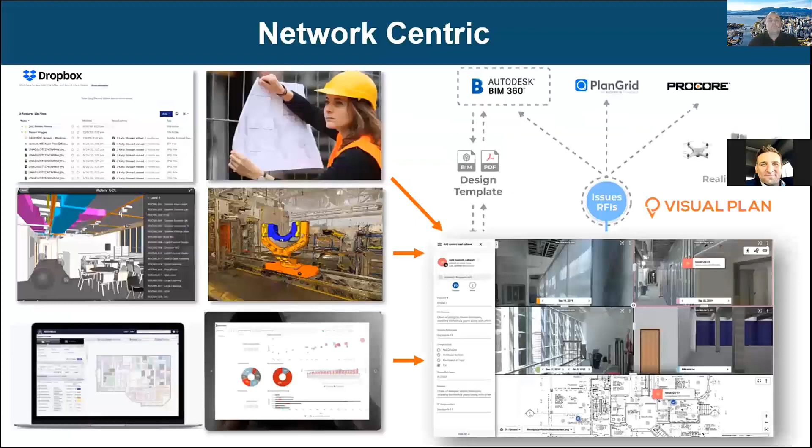I guess one of the biggest points here is that we work in these silos, and there are a few people that have access to the data when the organization could have a big value by having that data. Next slide. So let's talk a little bit about the physical CAD world and the different types of data sets.

So in the top corner here, a lot of what we do today as service providers of facilities, and even with different personnel in a facility department, we work in this land of file share, Dropbox, photographs, digital CAD PDFs, and how to manage that is challenging, or even physical blueprints.

If we're fortunate enough to have invested in digital twins through the construction phases, we may have BIM models, building information models. We may have point clouds and other really valuable data sets we've invested heavily in. But unfortunately a lot of these data sets end up on engineering's desktop, or they're hard to access and hard to find. I even have an experience like that myself I'm going to talk about in this presentation.

And then lastly, how do we get this information not only in a logical, sortable way that we can access efficiently, but how do we get it into our existing operational softwares? Whether it be an FM software, facility management software, CMMS software, whatever you're using to manage your data. We're talking about visual data, 3D data, and 2D CAD data. There's a lot more an organization needs to manage with documents, policies, procedures, et cetera, so it is a bigger scope than what we're going to talk about today.

But how do we do this efficiently, get access to that information quickly, and share it through an organization? On the right here we have a screenshot of our software, but how do we use construction management and project management tools, and add visualization elements to the process of what we're doing, so we can be a lot more efficient, make fewer mistakes, have less miscommunication, and overall fewer issues.

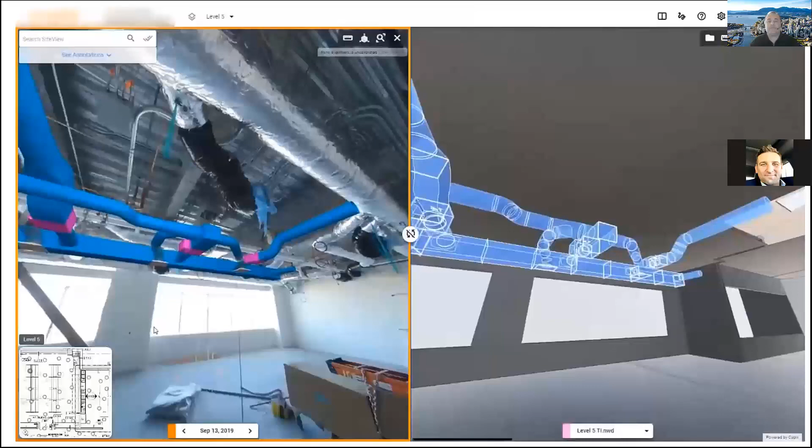I'm going to play this video as a simple example of a BIM model on the right, showing a specific model design of an HVAC system, and augmenting that reality into the existing structure, or doing some layout. For plant layout and basic clash detection, it's more about where is it and how is it oriented, as opposed to a precision engineering application, where LiDAR would be a better focus.

And we do host LiDAR as well. So all these data sets come together in the same platform: BIM, 2D data, 3D LiDAR, and 360 imagery.

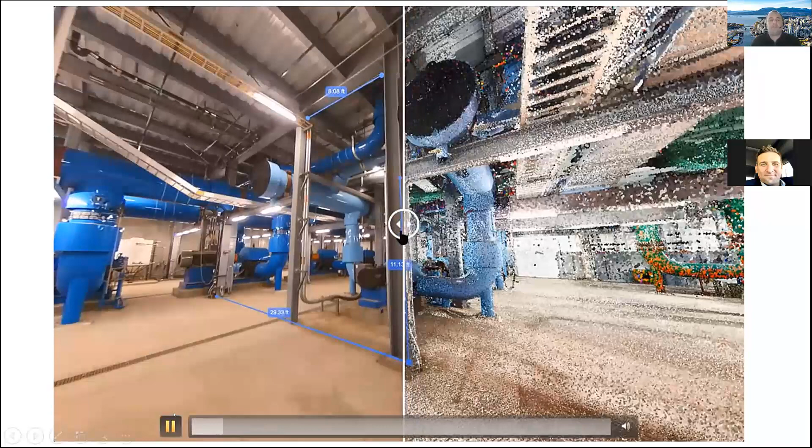Another thing we launched just today in beta is the ability to bring in point clouds and overlay them with 360 imagery and BIM, to be able to measure between them and reference between them. What's really critical is the way we bring this platform to market—it's a super easy, user-friendly platform, just like Google Street View, where you can toggle between these different data sets and access them. So we truly have a way to deliver data to an organization operationally.

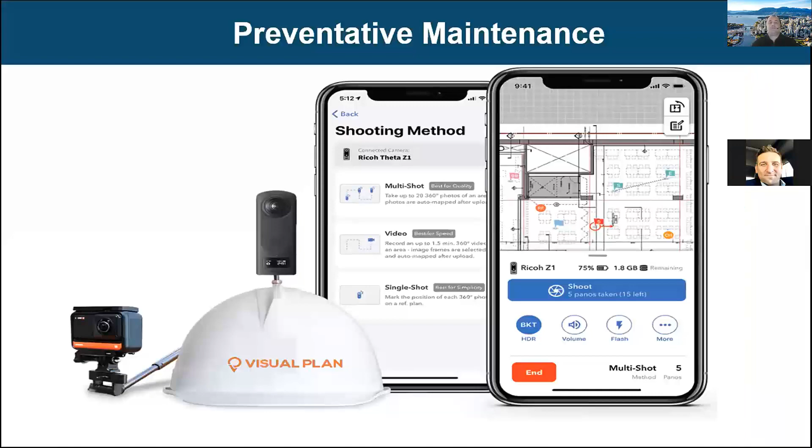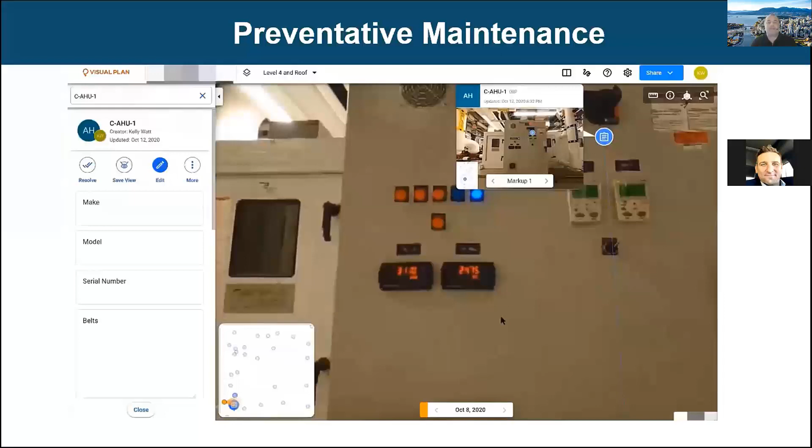This is a video as well, so we'll play it, looking at preventative maintenance. One aspect a lot of facilities would like to do, but it's very time consuming and tedious, is to tag all their assets effectively—to make sure we have make, model, serial numbers, belt sizes, filters, and historical information about their assets, especially the ones we need to maintain.

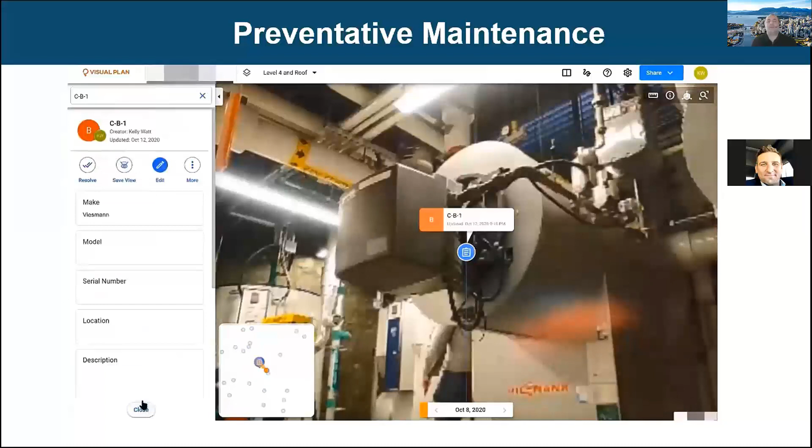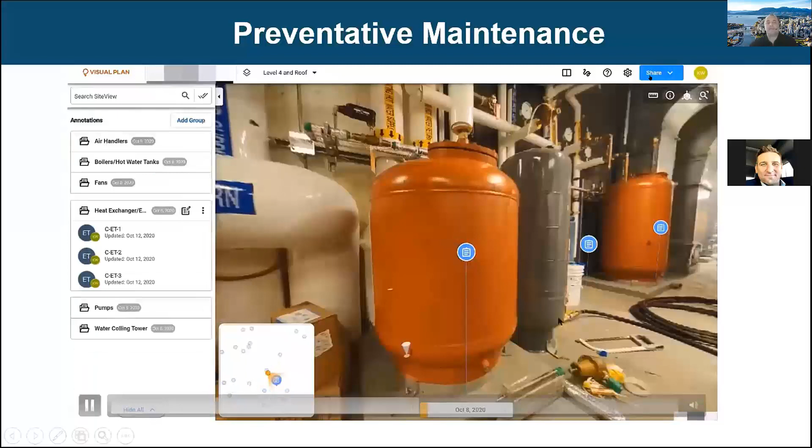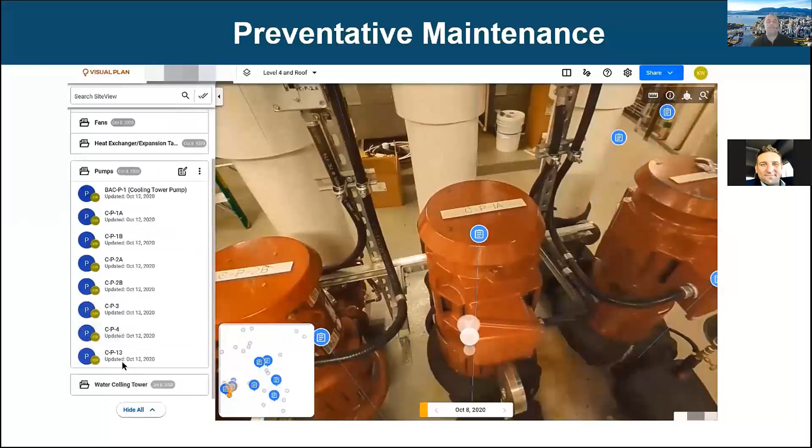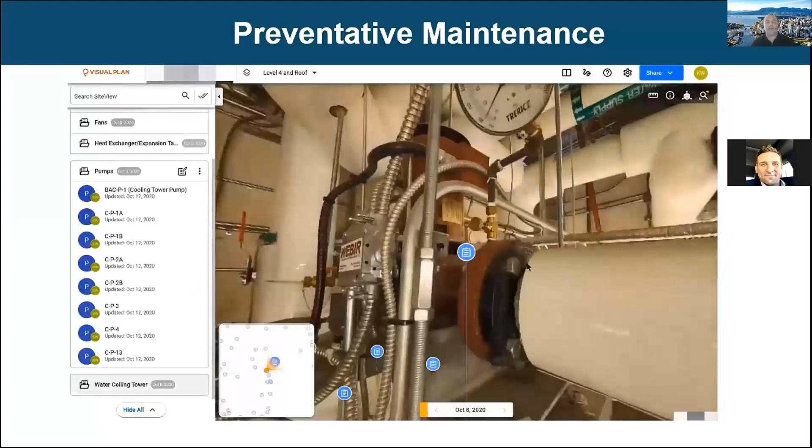So we have a really quick and easy method to do that, and this information, through a deep link, can then be embedded into your existing asset management software through the share link. We take this information, tag it, and give a web link to a specific room or space, uploaded to a CAFM or asset management software. Now we've turned something that's really data driven in terms of work orders and data entry into something a lot more visual, giving us context, orientation, measurability, and other aspects we need to see—because really, we need to see it to believe it in a lot of this context.

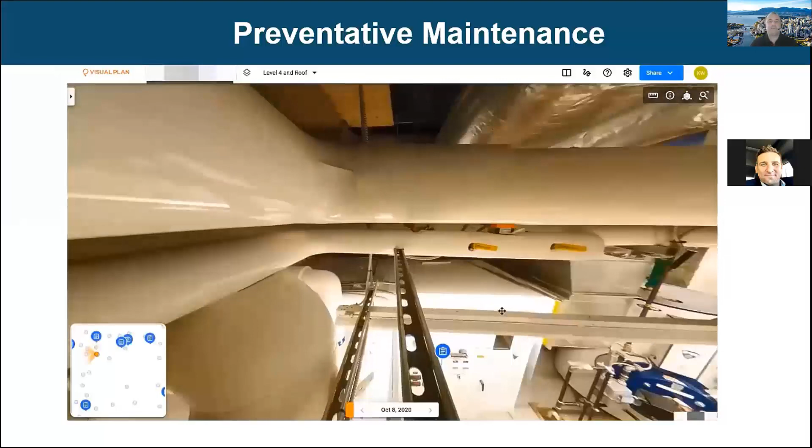So next, one of the projects we're working on is with an interesting company, PunchAlert. There are a number of mass notification softwares being used a lot on campus, hospital campuses and so on, where personnel carry their mobile device and can report issues or emergencies, and the reports go out through a text message and get to the right people quickly so we can respond.

With this company, we have a pilot with a university, and we're going to be taking our scans of the buildings right down to a room level, to a specific room, or in this case, we have some Bluetooth beacons.

So take it down to where that beacon level is. It could be a Wi-Fi device, it could be other smart sensors. If we know where those sensors are located in the building, I can give a link to the visual aspects of that point of the tour, and then have those links baked in so that when a notification goes out, you can click to see.

Click to see where you're at. And not only are you at that room, you have the whole tour at your fingertips, but at least you can start from that room. So managing the incidents and being able to send announcements, to receive tips through those deep links embedded into platforms or industry apps. And this is just one example.

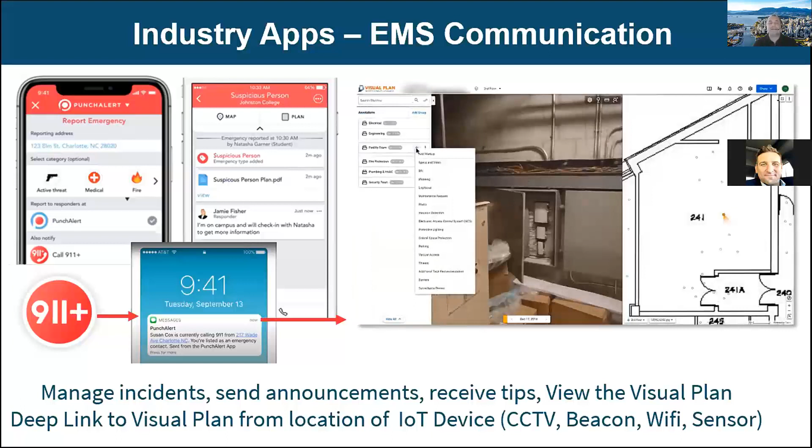And Jeg, our next speaker, is going to talk about smart sensors and how things like humidity and sound and all these other types of real-time data points that we get from a data analytics software, how can they bridge the gap from looking at dials to looking at the actual facility?

Now, can I tell you why? My experience. Now, I came from Faro. I came from the LiDAR space. I know how to deal with point clouds. So I asked for the point clouds of this project. I get them in a Dropbox folder.

I get 26 files. Okay, now what I have to do, I go to Faro, I get a demo version of the Faro Scene software. I download that, I process them. It takes me 8 hours, baked it on my business computer, and 8 hours later, I got something partially processed. I try to create the point cloud. I try to get the recap file. And what happens, I get frustrated.

Why? Because I don't have the Alienware computer, the $5,000 computer I used to have. So I'm not able to get that data in properly. So it is one of the examples of challenges we have with this complex data, whether it be BIM or point clouds or other, and it's hard to be able to share and see and to be able to compare those data sets. Obviously, I'm going to get this in later this afternoon, but I thought it was an interesting story to share here. Go ahead.

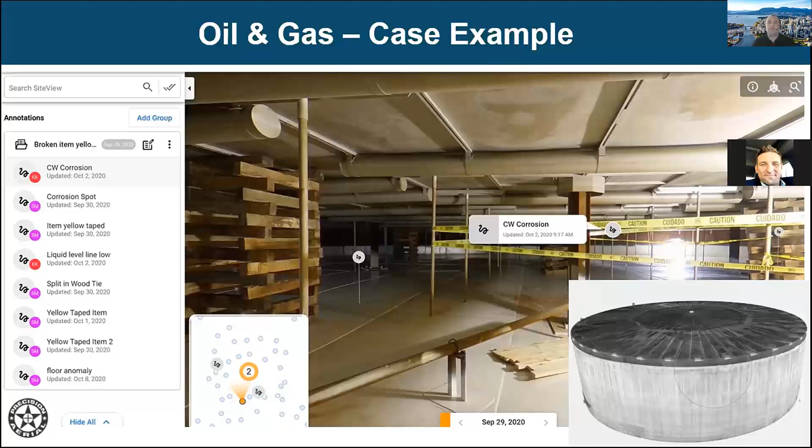We also work with drone data. So whether it is a drone point cloud that we brought in or a orthomosaic image that's created from a drone, or whether we're taking 360 cameras and actually putting them on the drones and flying them in different areas to collect 3D data and to ingest them and to be able to visualize them.

And there are other types of autonomous vehicles, right down to just getting an RC car. And what I like to say, a MacGyver, and be able to place a camera on it. And as long as we're within about 150 feet, we're in a crawl space and I want to be able to get access, it's a really kind of fun and easy way to get access and do that.

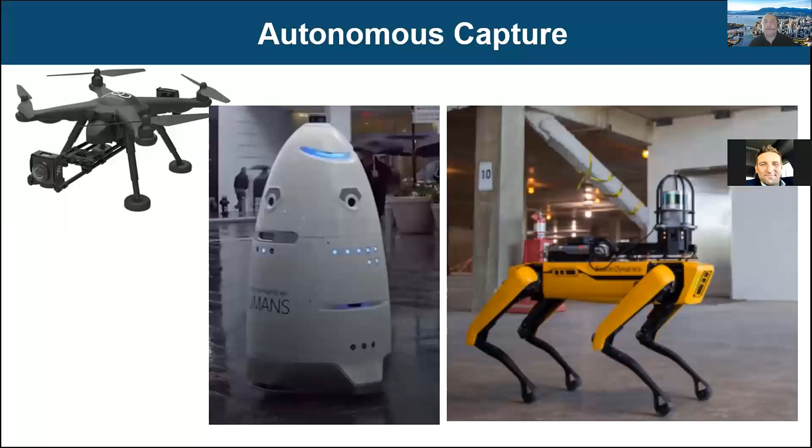The nice thing about what we're doing with the 360 imagery is the cameras that we're using, the hardware we're using is about a $500 to $1,000 camera. So extremely disruptive in terms of rolling something out nationally. You have 100 facilities, you want to capture them. That's absolutely possible. It's absolutely possible. Next slide. So a couple industry examples.

We're working with a company called Ion Asia that does a lot of work in Asia, in Hong Kong and mainland China, with multinational companies. One of the challenges we're seeing with COVID is we can't just fly out to these facilities and do site walks. So with James over at Ion Asia, we did a project a couple weeks ago with a large transportation company, scanning that and doing a quality and safety risk inspection. We took the standard industry forms they use and created those into actual annotations.

We could annotate physically into the visualization and extract that information into a spreadsheet and a report. So we work creatively with clients now, whether it be a maintenance application, a risk assessment, or a quality safety inspection, looking at different ways we can virtually walk through and tag items and identify issues. But more than that, to get on a virtual environment like we're doing today, to have other perspectives on a problem, to have a critical thinking exercise, and to determine the best results and the best answers to the problems we're facing.

Next slide. Another company we work with is Butchco Inc. and ESI Convergent. They put together a really cool package on helping companies get back to work. The process here - social distancing, testing, entrance assessment policies, and stay-at-home, work-from-home - is really dependent on facility information to do their job. But again, they themselves can't always get to the facilities.

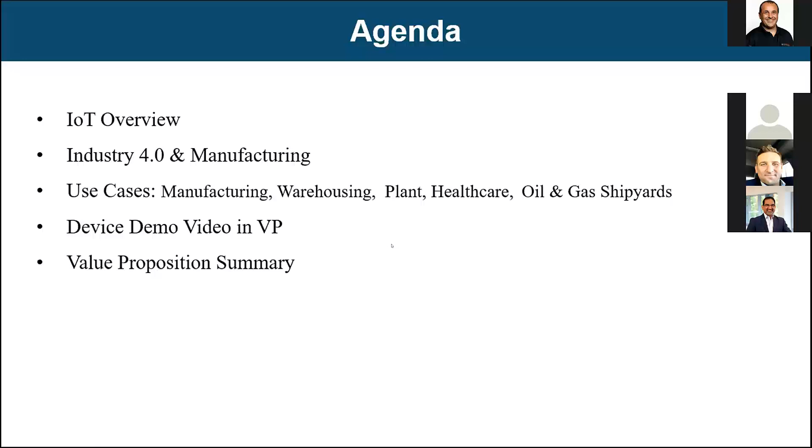Quick introduction, I'm one of the co-founders of IoT to Analytics, founded in 2019. Our focus is logistics as well as manufacturing using Industry 4.0. We have partners with a wide area of experience, over 150 years. Our core thing is provisioning of customized IoT solutions. Expertise in cloud as well as edge computing. Invested heavily on devices, sensors, gateways, advanced analytics and stuff like that. Some of the things we have put together today, we'll talk through it. We also have an overseas development center for devices and sensors.

With me today will be Brett, who's basically a business development manager at Visual Plan. He has been 18 years in the facility and manufacturing environment. He'll be helping me out. He's got 7 years in 3D LiDAR and the metrology industry. He also has expertise in software and capital industry as well.

So let's do a quick IoT overview. What is an IoT? Many of you guys might have heard of this one. IoT stands for Internet of Things. Basically, it's physical digital devices with sensors to collect and share data, right?

Generally, you can either have a sensor separately, or you can have a gateway which consolidates the information from all the sensors, either Wi-Fi or cellular connected devices. You can have either a cloud-based solution or an edge-based one, depending on your applications. This is about collecting and consolidating information to track any of your assets. So if you have any physical assets you want to track, and you want to understand their dependability and variability in how they're functioning right now, you connect through all these sensors and use cloud and edge to collect the data, and then you analyze it.

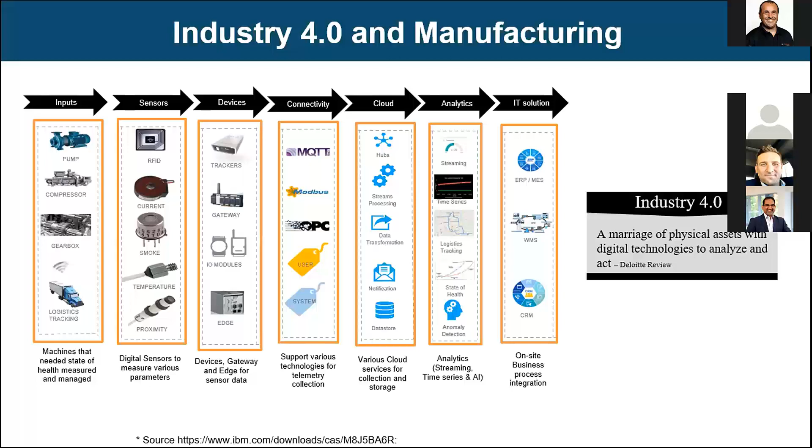So this kind of gives you a holistic view about how all these components of IoT combine together and provide a solution and make sense out of this Industry 4.0.

Next slide, please. Yeah, this is a small POC. My partner and myself, we did that last year. We had an asset which we wanted to identify and track some core parameters of. Here, we were monitoring current, vibration, temperature, and humidity, and trying to calculate this OEE, which is overall equipment effectiveness, and how you can use that OEE, as well as data, as well as machine quality.

And as well as the machine hours and those kinds of stuff. How do you do a proactive equipment maintenance? And how do you reduce your inventory of spare parts? And can you do some kind of prediction of the remaining useful life of a motor or a pump or those kinds of stuff?

The picture you guys see was a real-time picture at that time. We calculated, we had streaming data coming in. I think it was every 30 seconds or something like that. We were calculating the data, and any exceptions that happened would basically send an alert notification to your email or to your phone number, just something like that.

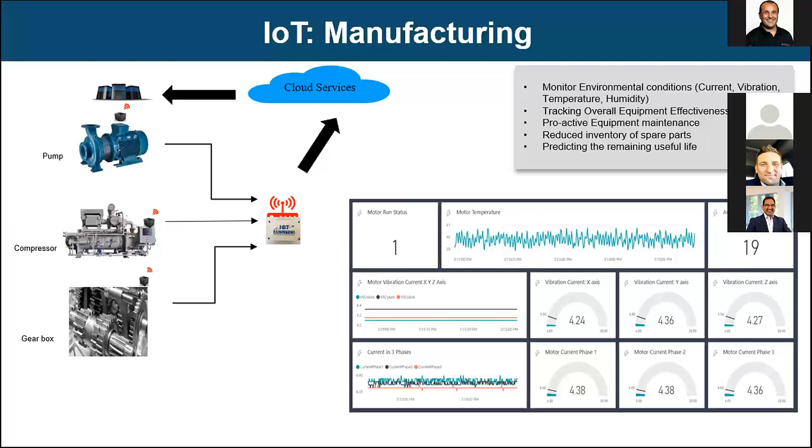So next slide, please. Yeah, this is another fallout of our POC type experiment, what we were doing. You can see the machine availability by run hours, by different types of machines. We had two different machines there. And also we had how the manufacturing performance was doing. We were using some binary keys to collect that. Mostly, generally this type of information will come from some kind of infrastructure already placed in PLC or SCADA or something like that.

Information was coming in, and then you also see quality by hours. So you basically identify some of the products you have, was that a rework, and those kinds of stuff, and then eventually we calculate OEE by hour. This is how you're able to see how good the performance is on the manufacturing on the shop floor at that moment of time. And if there are any changes on this one, we will definitely alert the supervisor on the floor and those kinds of stuff.

The slide on the rightmost is what we were trying to do, predicting the remaining useful life using AI. We were not able to do that at the time, but it's something we will do going forward as well.

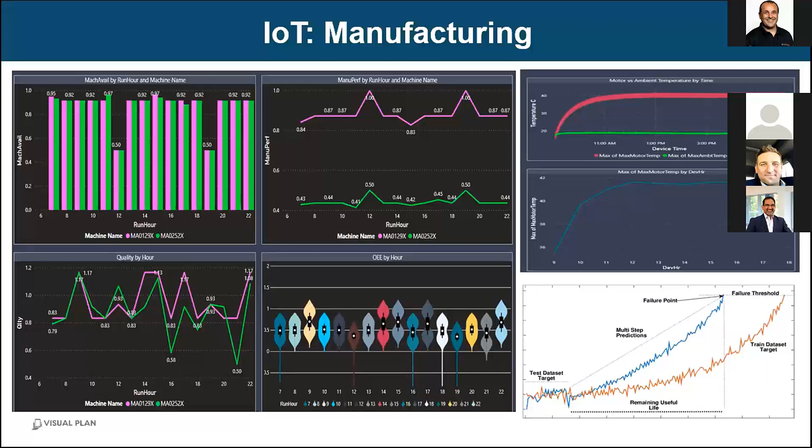This is another example we've been working on with customers, for warehousing and plant, for digital assets constantly moving either in plant or in transit. The assets here are what we call a gaylord, or you can call it a tote. These assets and totes are identified and tagged with smart sensors, and these tags and sensors talk to our gateway devices, constantly monitoring their presence and where they are. These sensors assigned to the gaylords and totes can have multiple different types of sensors - a temperature sensor, humidity sensor, or even a vibration sensor. This was one of the pharmaceutical customers we were working with, where we collected that information, I think every 15 minutes, and sent it to the cloud infrastructure, integrating it into their existing solution as well.

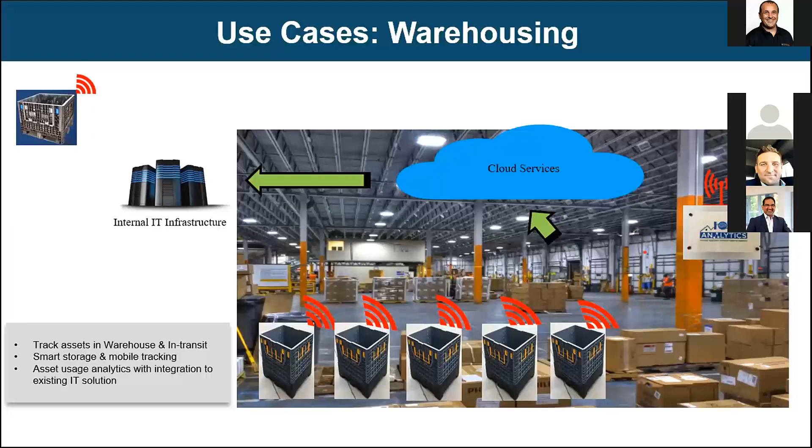This is another use case we are working on with Visual Plan along with digital twins. You saw some of the things Kelly talked about with digital twins - how do we take advantage of streaming data and combine it with the digital twin? How do we make the user feel like they can go into these visual plans, the data set, and look at streaming data right there and then.

Let's say, for example, these are some of the use cases. If you have an asset like a robotics unit, and you've tagged that asset with some kind of vibration sensor, or multiple vibration sensors, or even a temperature sensor, or location-based sensors - you can go into Visual Plan's software and say, give me a list of all the robots which need calibration, because those data attributes of those robots have already been captured as part of the sensor rollout. So you'll have the metadata characteristics of those robots. Or if it's a battery, you want to find out how many assets are using this kind of battery and where. Or if you want to see all the two-stage air compressors and where they're placed - given these assets are tagged with sensors constantly streaming data, you'll be able to visually go into Visual Plan and look at live data sets and query the data, just like street view in Google. That's one of the things we've been working on with Visual Plan, to see how we can enrich these solutions and make them more visually connected to the users.

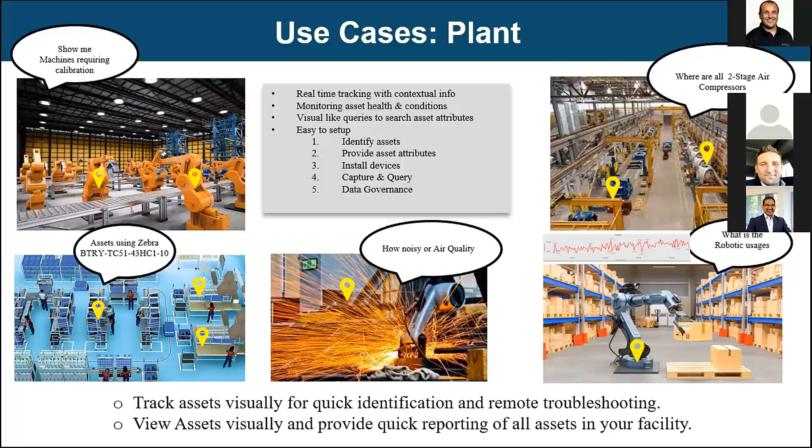Someone asked if it's possible to get a screenshot. Sure, we can definitely share it.

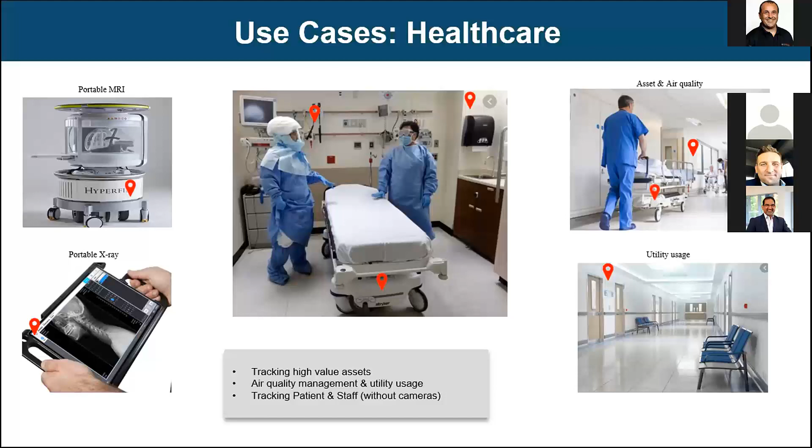Another use case is for healthcare. On the left side is a portable MRI. These are high value assets - you have an X-ray machine, or a bed, or even air quality monitoring given the COVID situation, or you want to see the utility usage in a given corridor. All those things can be tracked with different IoT sensors and the gateway to collect that information along with real-time data. With Visual Plan, you'll be able to see what's going on right now, where the asset is, and what the utility usage has been for the past 1 hour or the past 12 hours.

This is another example, oil and gas shipyards. If you look at it, tracking personnel and assets.

So for any asset, even if it's just personnel, we hand over small tags that constantly talk to cellular-connected gateways, and you'll be able to track and see where this person is right now, as well as use it for evacuation routes in case of emergency, so you know how to get out if something happens.

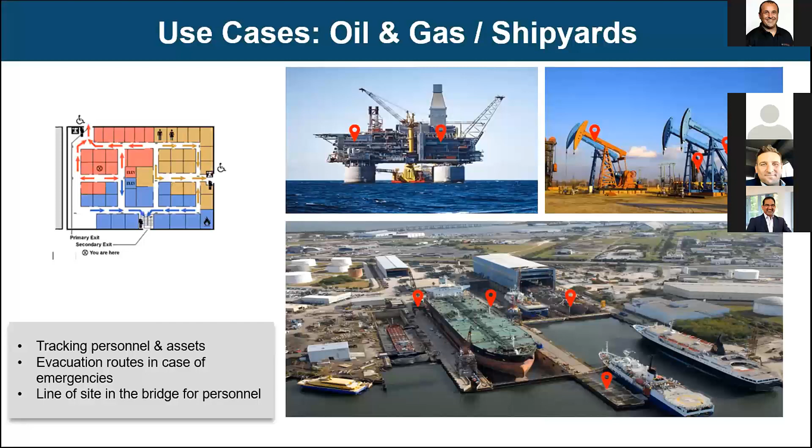These are some examples which we'll continue to work on with Visual Plan, as well as IoT analytics. Next slide, please.

This is a demo which Brett is going to show, of how all these things put together will work to show real streaming data.

Thanks, Jag. I'm going to explain what we've got. This is a little bit of the more fun part, where we get to put these devices into action.

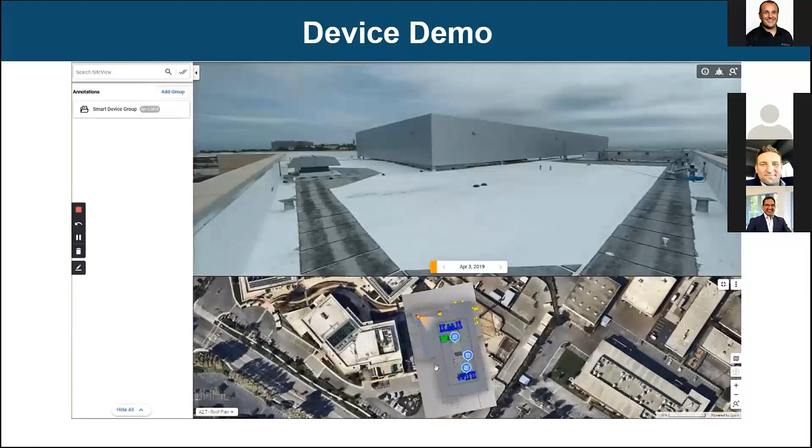What we have here is a rooftop inside Visual Plan, on top of a 5-story building. You're looking at a GIS interface satellite view, and inside Visual Plan we also have the ability to have a street view, so we can toggle between the two. Just wanted to give you a 360-degree viewpoint here on top of the roof.

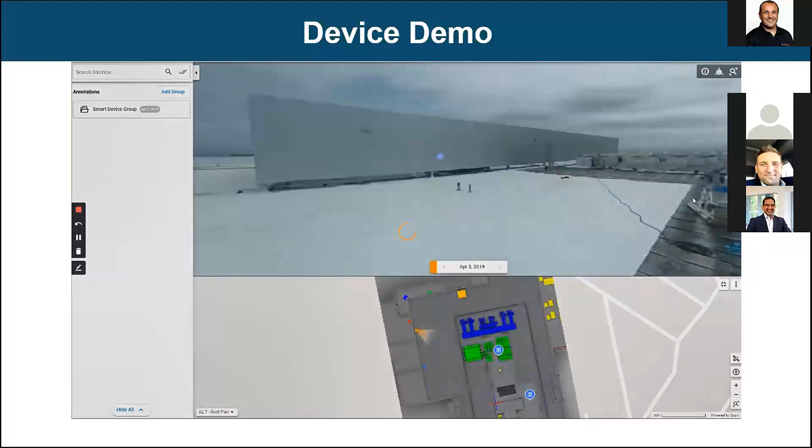We're actually going to go inside that building on the top. I'm scrolling around for a second to give you a different view and show you what Visual Plan can do for you.

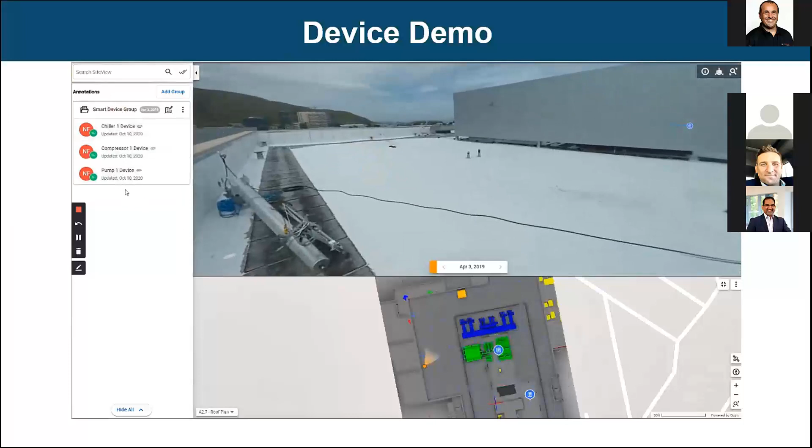Now what we've done is set up 3 active devices and 3 annotations. This is the pump room in the mechanical room here on the roof, and I just wanted to give you a 360 viewpoint of it.

What we've done is put the devices by the pump and linked the URL to that device inside Visual Plan. I just clicked it, and now we're going to the data analytics page, or the dashboard.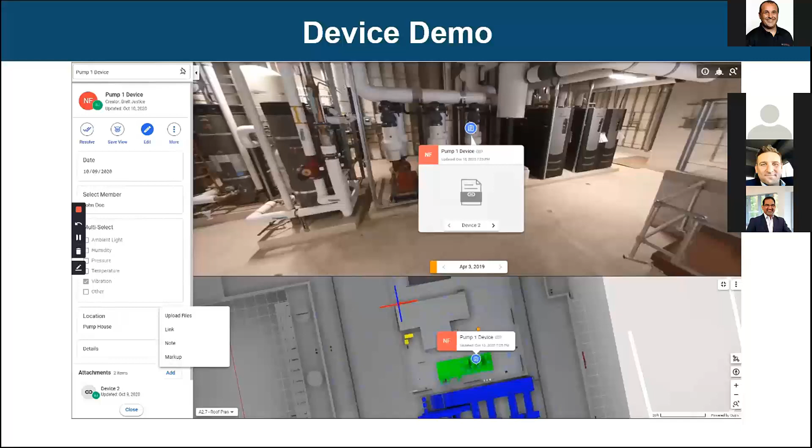Skipping back to Visual Plan, you can see inside the annotation we can put whatever asset information we want, whether it's a photo of a nameplate, links, notes, or markups for that asset.

Moving to the second device, which is in the compressor area, right down from the pumps. You can see the pumps in the background there. I'm scrolling around for a second to give you that visual feel.

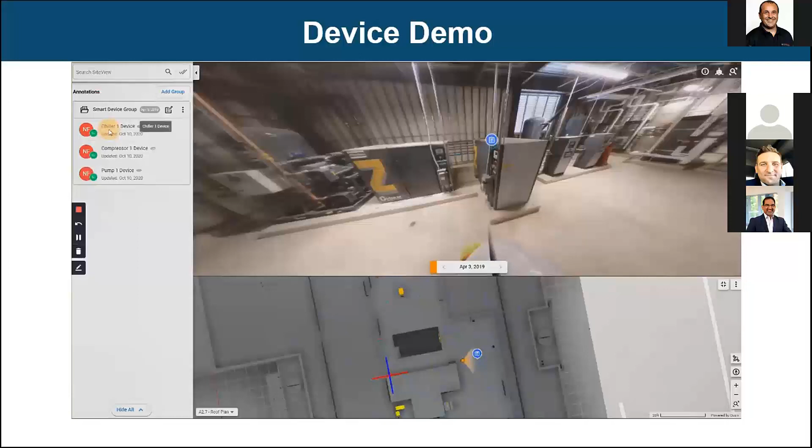By clicking again on the URL on the annotation, we go right to that dashboard and get that live reading. We're actually collecting data every 3 seconds, so we're able to provide real-time data to detect any problems that may arise.

Now we're flipping to the chiller room on the roof. This time I'll click on the URL and we'll go to a report, which compiles all three devices into a graphical interface that's going to pop up here in a second, charting all three devices together to show how they're doing.

You can see over here in the temperature location, it looks like we got a spike in temperature for that chiller area.

If I do a refresh, you'll see it update for us, and of course you can see there, we've got another anomaly.

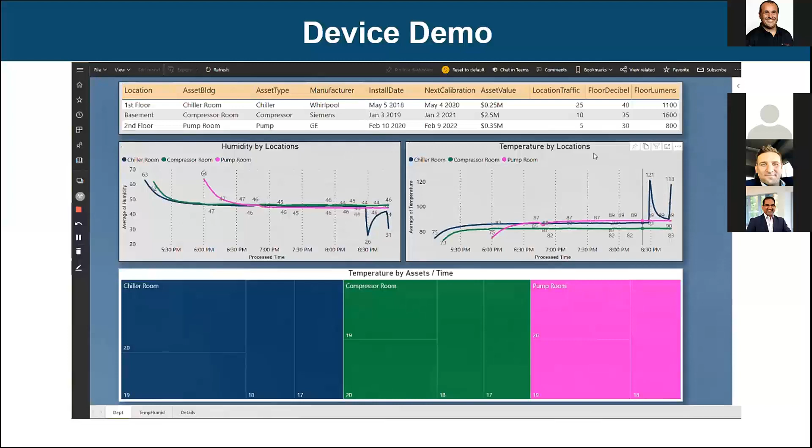So what this could show us is, hey, we might have a problem going on in our facility. At that point I can verify by going back to the actual data dashboard to check what that temperature is.

If it's too high, we can share this information with whatever stakeholder we need, whether it's the engineering department or the maintenance department. We can share in real time all the information visually directly to those individuals, and they'll know where it is, what's going on, and what tools or items they need to bring to fix or take care of that issue.

That's the power we can provide within Visual Plan, just by linking those devices and possibly enabling remote troubleshooting, which is what we can do moving forward inside Visual Plan.